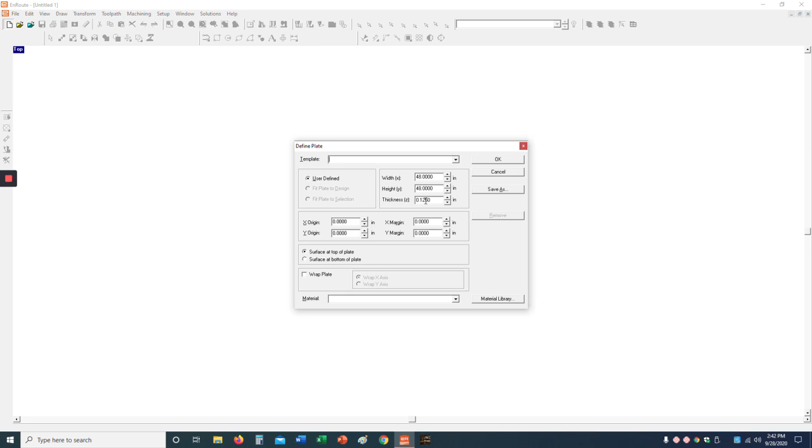After it opens up, we are going to make a new document, and the size of our plasma table is 48 inches by 48 inches, and we'll be cutting this out of 0.125, which is 1/8 inch thick steel. So we're just going to click OK. And here is the sheet of steel that we are going to be cutting.

Now, I have already made all of the different parts to this fire pit. The only thing I haven't done is I haven't put it together to make the actual Spuds fire pit yet. So I'm going to go ahead and open up some of my previous files that I've already made, and I'm going to look up fire pit. So fire pit master right here. So if I click fire pit master, again I'm just opening that up.

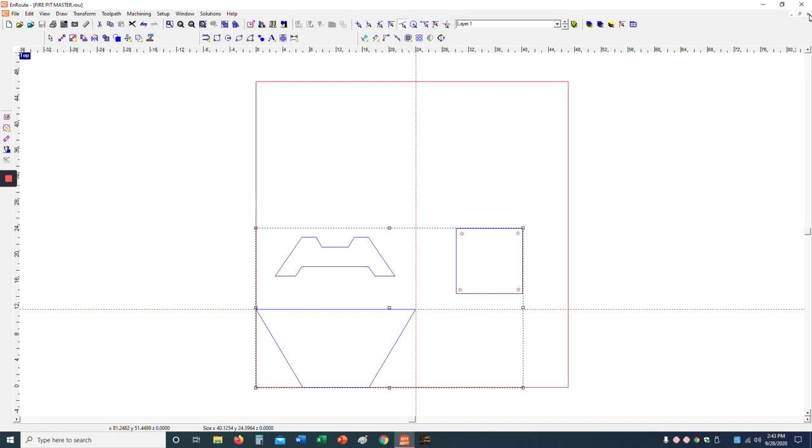That comes up with the 3 different parts that we need for our fire pit. We have 4 sides that are this shape, 4 bottom pieces for the legs, and then we have 1 bottom piece right there. I am just going to copy, so I highlight all of those. I'm going to hit Control C for copy. I'm going to close this because I don't want to mess up this file since this is the template. And I'm going to paste those into my new sheet that I am making. I'm going to drag these up to the top so they're out of the way.

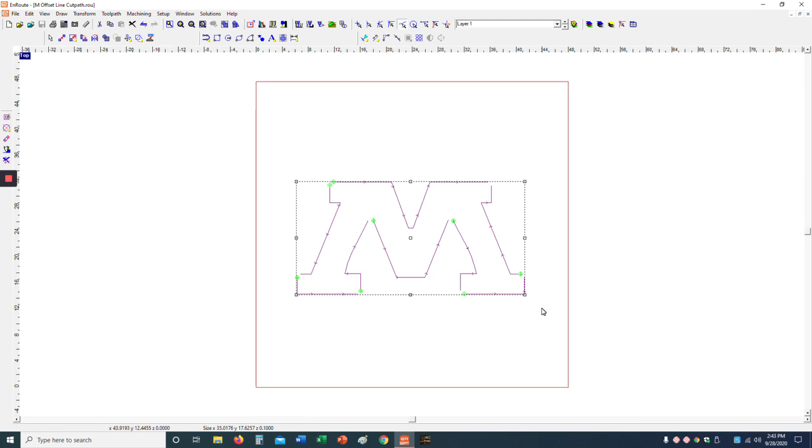And then I'm going to need to add an M to the side, and I'm going to have to add Spuds to the side for the bottom piece as well. So again, I'm going to open up files that I've already made. One of them is the M offset line cut path. So I'm going to open that, and I'm going to copy this as well. Highlight it all. Control C for copy. Close it. And I'm going to paste it.

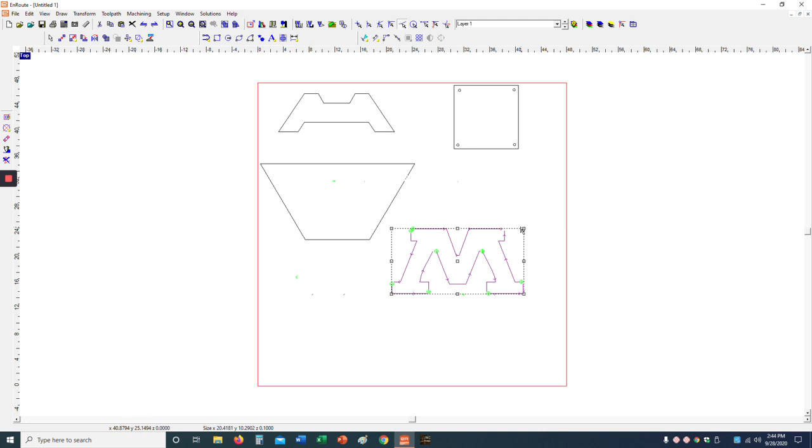Control V. Now obviously this is way too big, so I'm going to hold Shift as I click and drag, and that is going to bring it down. No matter what I do with my mouse, it is going to scale it correctly and not skew it. If I just grab one of the sides or the corners, I can make it tall and skinny, which I don't want to do. I'm going to hit Control Z to undo it. Anyway, so I need to make it the correct size. I'm going to bring this up and over, see how it fits. Make it a little bit smaller.

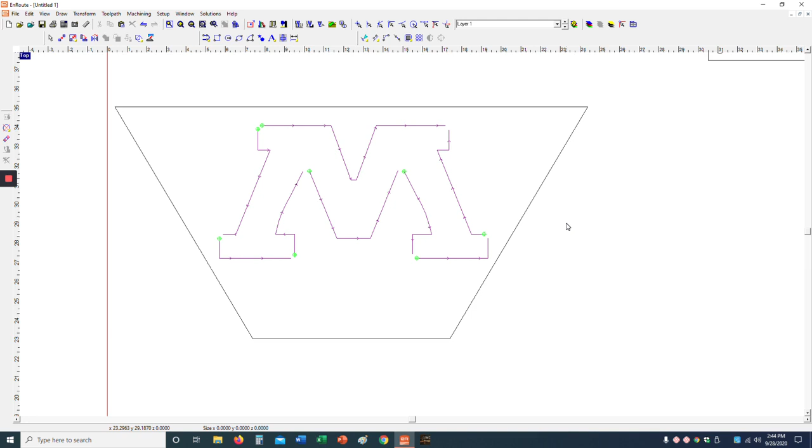Now to zoom in, I'm just going to scroll forward with the mouse, and then I can see what I'm doing here. So this already has cut paths on it. I'm actually going to delete those real quick. Delete the tool paths. So this is the M. Now you'll notice that the outside right here is highlighted in blue, whereas all of the inside is highlighted in pink. When there's a pink line, that means that it is not a complete shape. It is not going to cut anything out.

So I want the whole outside of the fire pit to get cut. That would make sense. But I don't want the whole M to drop out, which is why all of these are individual little segments. So I just want this to be outlined. So this is going to be roughly a line thickness, so about maybe 10/1000ths of an inch or so, which is roughly 1/100th of an inch, or maybe close to a 1/16th of an inch tops in terms of width. And this will now be just a kind of a see-through M. Again, I don't want the whole M to fall out, because then embers and stuff like that will fall out of my fire pit, which I certainly do not want.

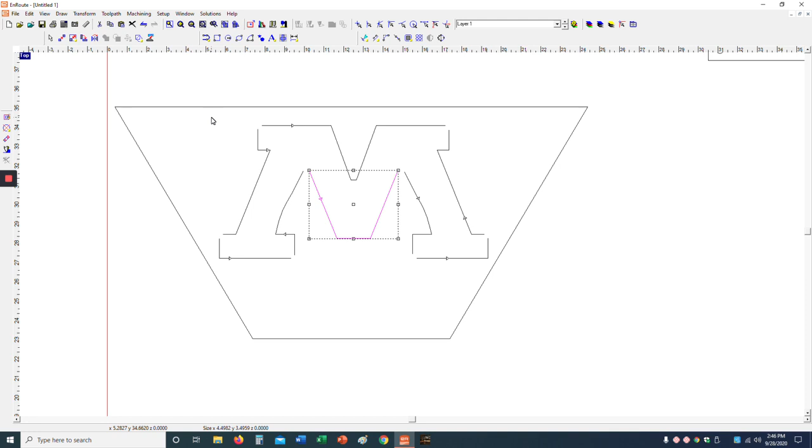And I don't think other people want that on their fire pit either. So each of these corners are open, so that way the metal continues and it's never truly disconnected. So I need to make a cut path for all this, and I think this is pretty well centered just looking at it. I'm going to highlight this and just move it to the left just a tiny bit.

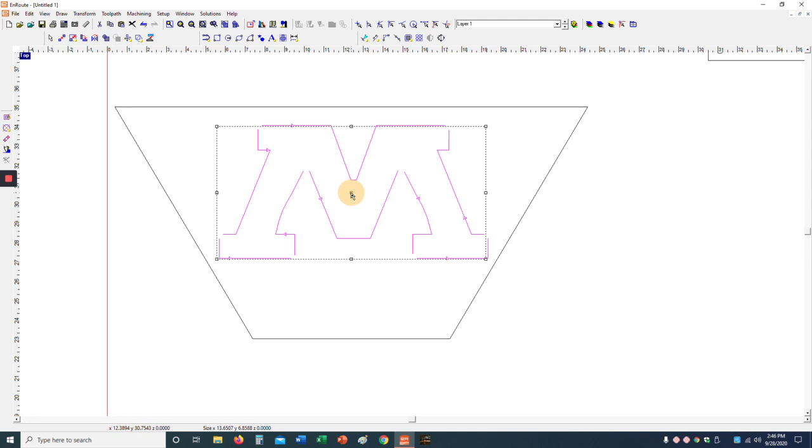Just like that. And I want to take a look at that gap right there and that gap right there, and they look pretty close. Now I'm going to make my cut path for the outside. So I'm going to go to Tool Path, kerf compensation. Kerf is the material that gets removed by the plasma cutter. The kerf width, it's supposed to be about 5/100ths of an inch, but it's actually a little bit more than that.

This is an external cut, which means that the cut is going to take place on the outside of the line, and then the edge of the kerf will be where the line actually is. I need an exit and entry type right here, so that way when the machine starts and when it finishes, it doesn't end up cutting into the plate.

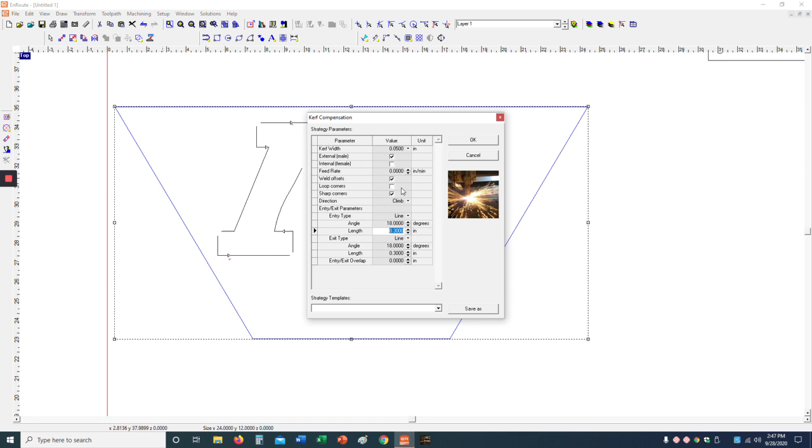So I'm going to have a line that's about 18 degrees from the actual line where it starts cutting, and the length is going to be a little bit, we'll go about 0.3, so 0.3 of an inch. Again, it's going to be an external cut, and I'm going to click OK, and you will see the cut path. I'm going to zoom in here. This is the cut path right here, this blue line.

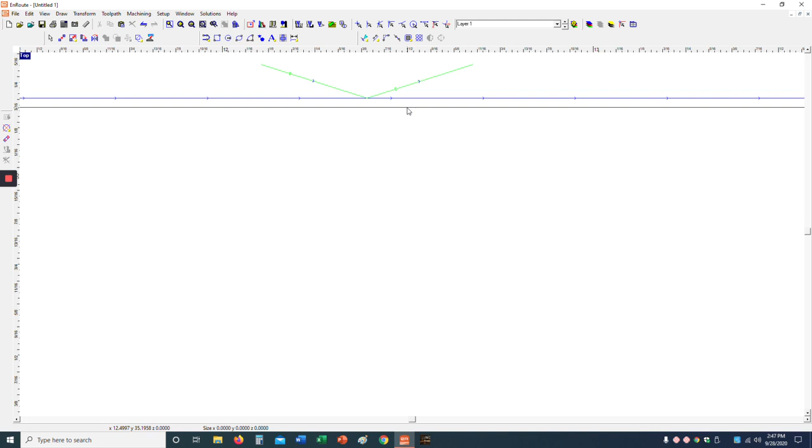This is the line that I want to hold. So this is the size of the fire pit plate that I want to hold. So again, this is the cut path. It's going to pierce through right here. It's going to cut in, travel along the blue line all the way along the outside, go all the way around, and then it's going to come back, and then it's going to exit right there.

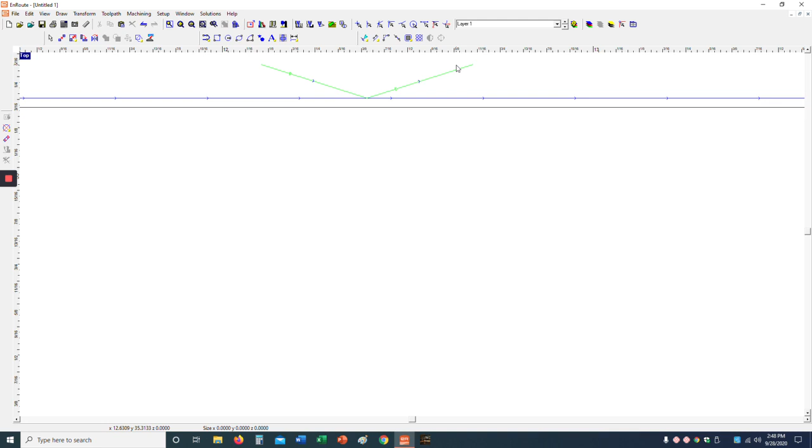And that little tiny overlap that you've got there might have a tiny space on the top that's going to be kind of goofy, but I can fix that by changing where my exit and entry are. So I'm going to click this, and I'm going to go to toolpath, and edit the entry/exit. So when I click on that, I can grab this and I can move it, okay? And I'm actually going to move it down to this corner over here.

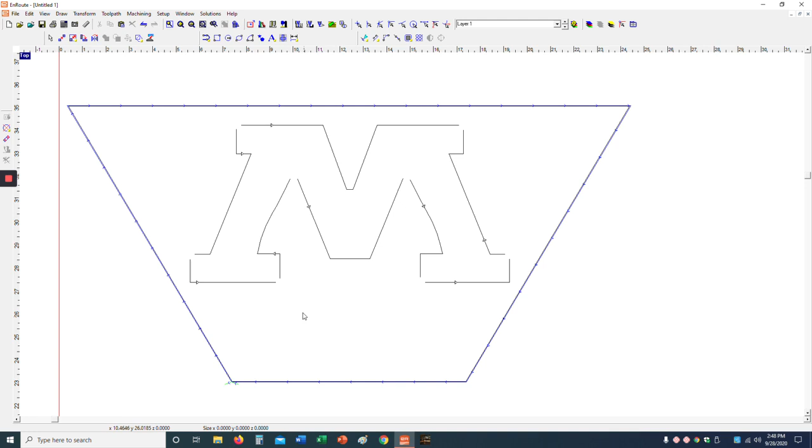And the reason I'm going to move it to the corner is pretty simple. This is going to get covered up with weld, right? So this is going to be the bottom corner, and there's going to be a really easy, simple base plate right here, and then obviously these are going to get connected on the side, so it's going to make a much nicer cut.

Now for the inside of the M, I'm going to highlight this, and I am going to go to toolpath, and this has to be an offset open contour. Since it's not actually cutting out a shape, it's just cutting lines, it has to be an open contour, which is indicated by all of the pink. So I'm going to double click the kerf right there, and I am going to go to a depth. It doesn't really matter what the depth is, but I want it to be in the middle of that line.

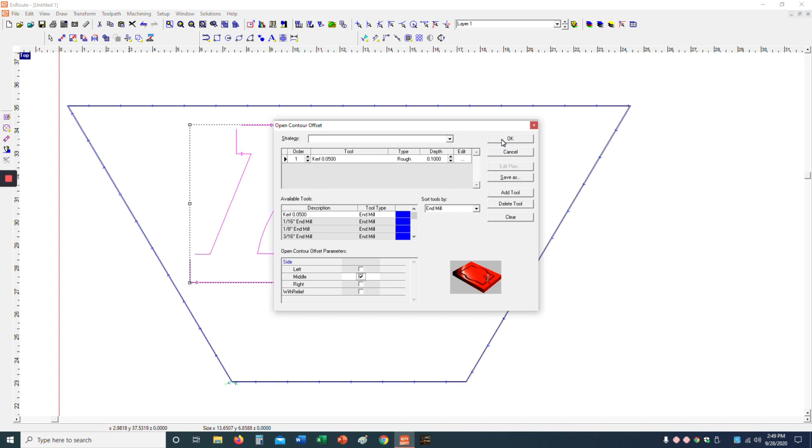A lot of people like it to be on the outside or the inside of the line, or to the left or to the right of the line, but I want it to be right on that line. So I'm going to click OK, and now you can see the pierce points, which are the green little crosshairs. That's where it is going to pierce in. So it's going to pierce here, it's going to travel along, travel, travel, off. Lift, pierce, travel, travel, turn, turn, and done. And it's going to go through that for the entire M.